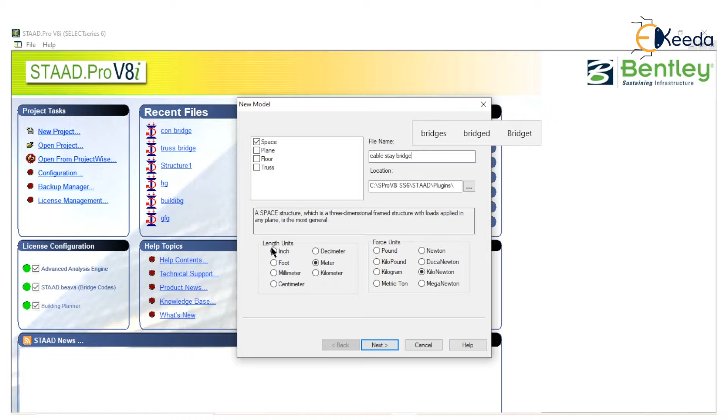Open new project as a space frame and provide a name as cable stay bridge. Select a location. Length unit will be meter and force unit is kilonewton. Next and finish.

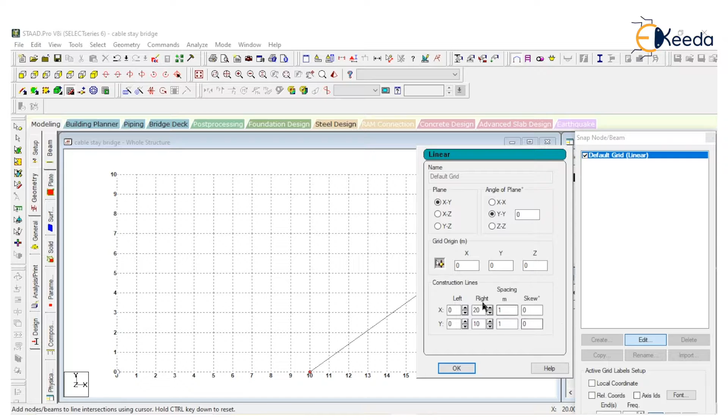Just go to edit and edit it up to 20. At the 10 meter, I'm providing one column. I just increase the height up to 15 meters. Okay. Now at the height of 6 meter or 8 meter, I am creating one beam.

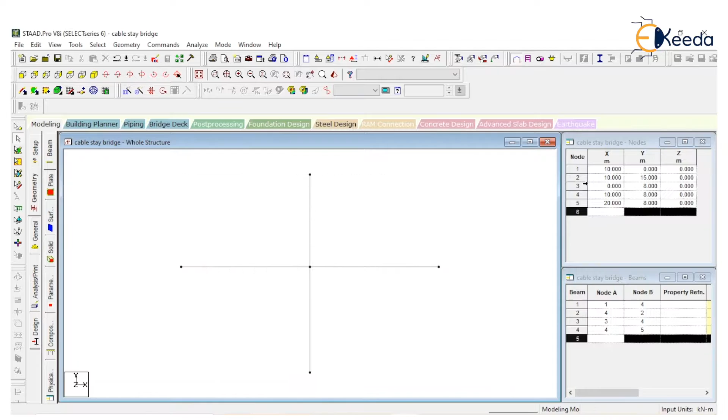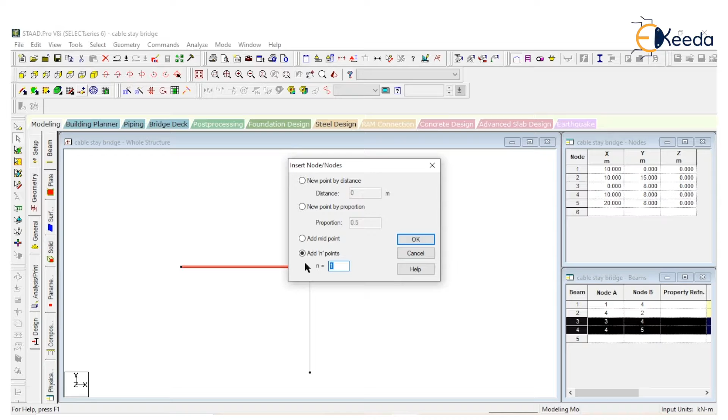Now look at this. Just add some nodes to this particular beam. Insert node, add n points, and I am just adding 7 nodes or 8 nodes to the beam. And in this beam also, I just add some nodes, around 8 nodes, add n points.

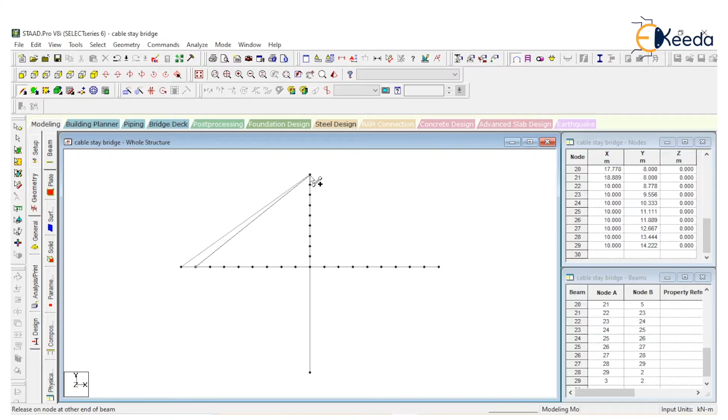Okay. Now go to add beam one by one from first node to the next node. All these are the cables. Just create all the cables.

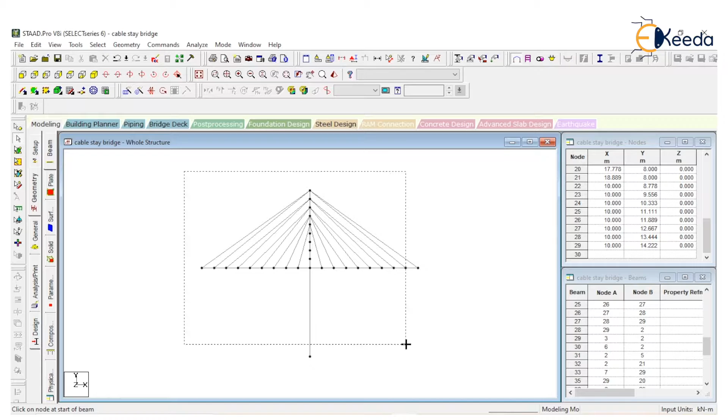Okay. Now select and translational repeat in Z direction. One step of 8 meter or 6 meter I am providing. Link steps, open base, and okay. Look at this. The bridge is created, but take a front or side view and delete all these members.

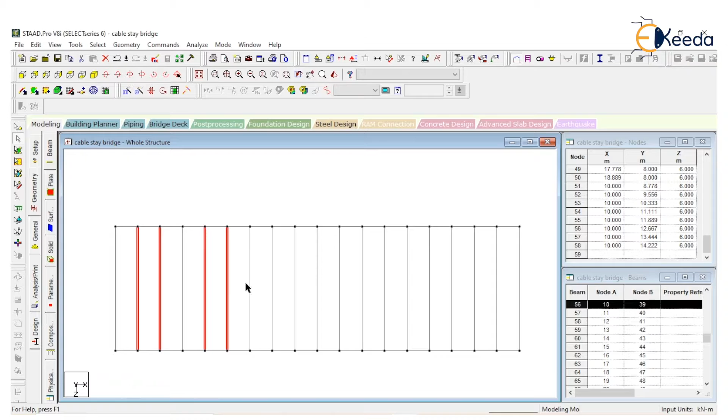Do not delete the bottom member. Okay. Bottom member will remain same. You can delete some intermediate members. Take a top view, I'm just deleting all these members. Then go to side view, select this, insert node, add midpoint. I just want to add one point in between.

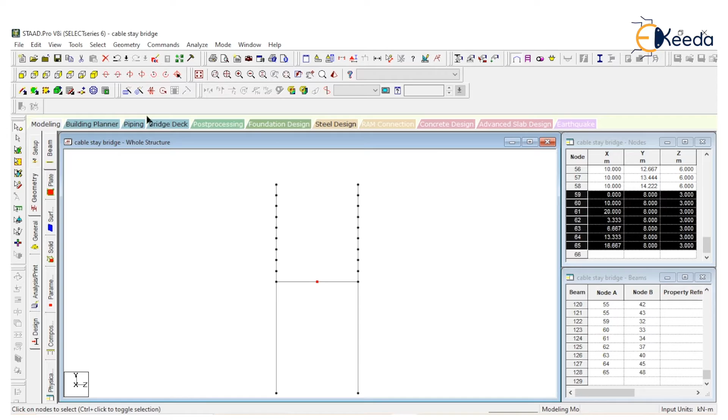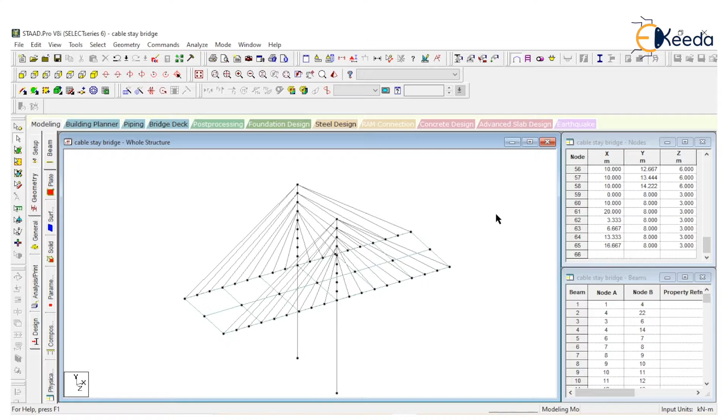Take a node cursor, select this and go to geometry. Connect beam along x-axis. Okay. Now look at this. There is one another member. Go to the beam cursor, select all these beams. Fill floor grid with plate. 12 new plates are created. 3D rendering. Okay.

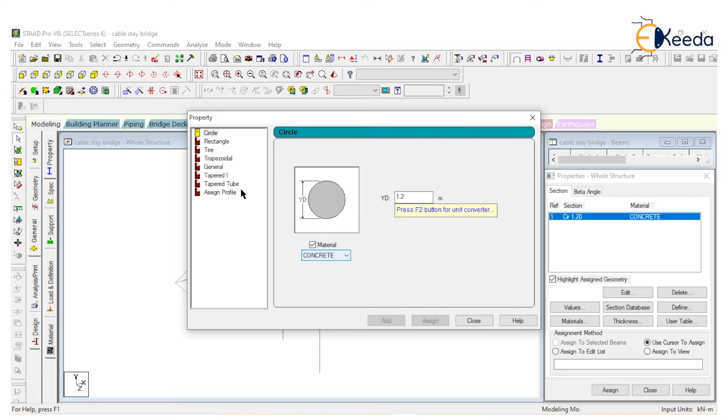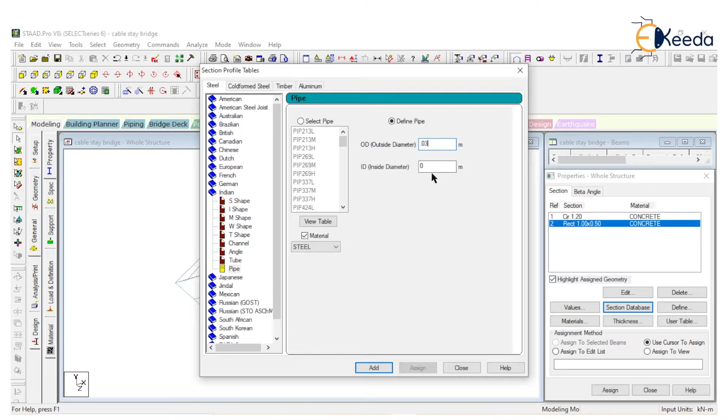General property. Go to define. For column, I am providing a dimension of 1.2 meters. For all the beams, I am providing 1 meter depth and 0.5 meter width. And for the cable, go to section database, Indian pipe, and define outer dia. I am providing 0.03 for 30 mm, and do not provide any inside dia, and assign it to all the cables. Assign to selected beams, assign, and yes.

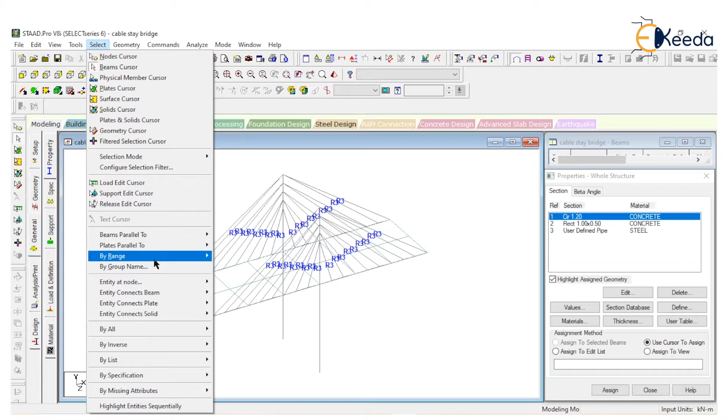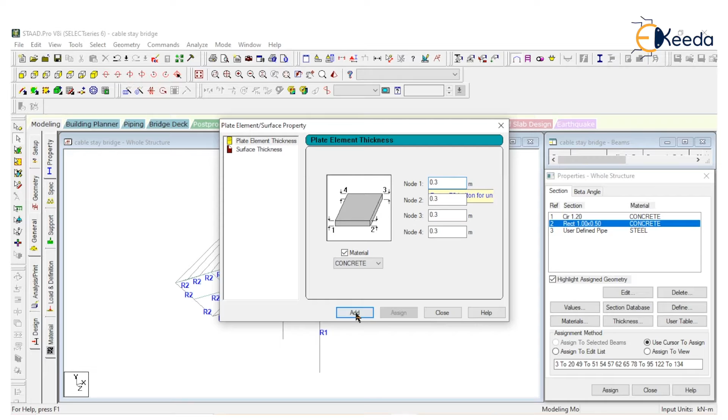Okay. This one is for all the vertical columns, and the next property is for all the beams. Take a front view and select all the beams. Assign to selected beams, assign, and yes. Go to the thickness, for plate thickness. I'm providing 0.3 meter and assign to view. It's a 3D rendering.

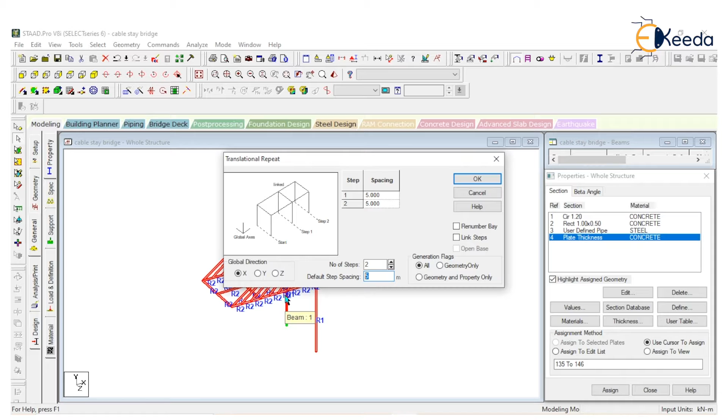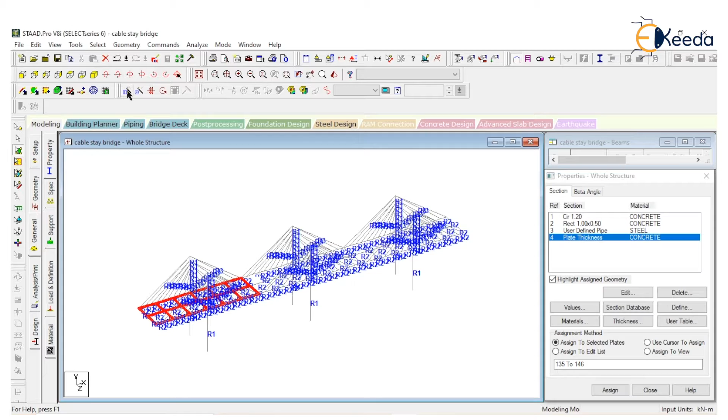Select this one, go to translational repeat, 2 steps I'm repeating it, of 20 meters and okay. It is repeated 2 times. Okay, what is the mistake? We have not repeated any slab element. Just select all the slab, or before it select by the geometry cursor so that it will repeat automatically. Go to X direction, 2 steps of 20 meters and okay.

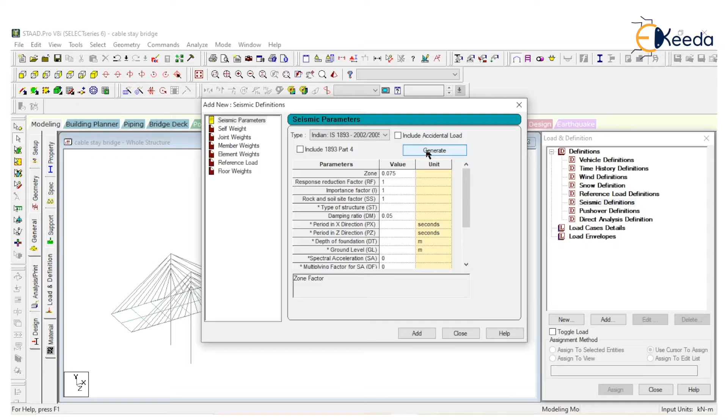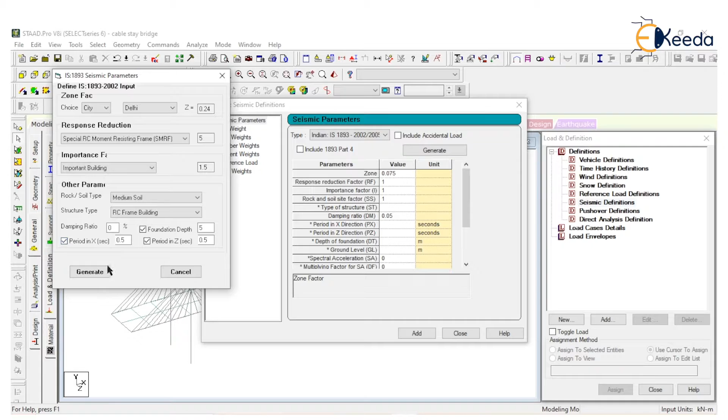Now go to load and definition. You can provide seismic loads in this particular structure. Go to seismic definition, Indian IS 1893 2002/2005. Go to generate, select a city. I'm selecting Delhi, and special RC moment resisting frame. Importance, medium soil, RCC, damping, depth of foundation, period in X and Z. Add the self weight and okay.

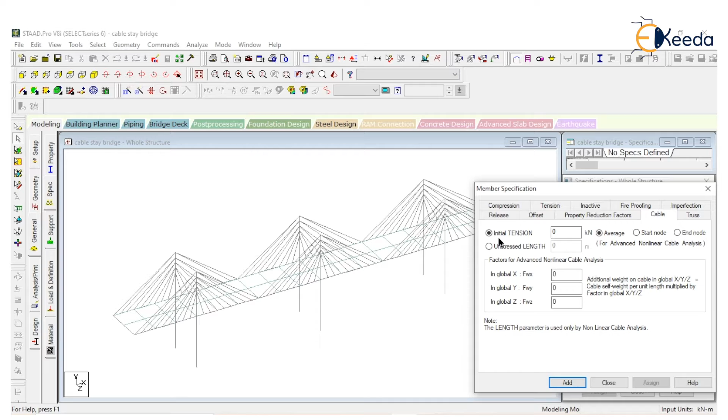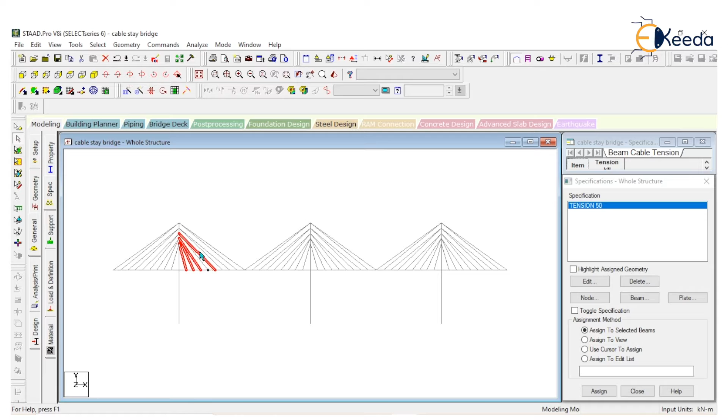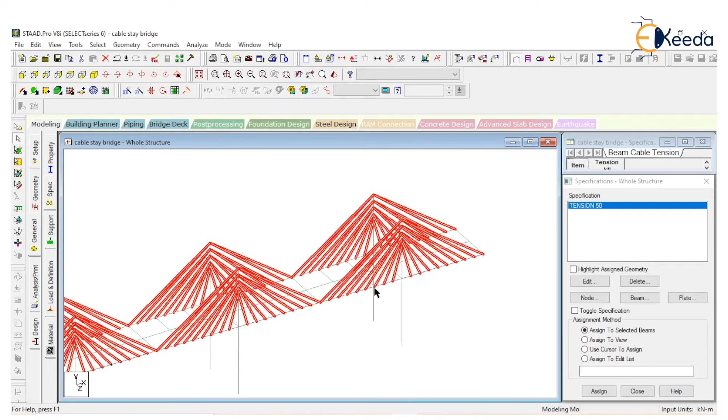Before that, we have to assign a specification for the cable. Go to specification, beam, then go to cable. If it is a tensioned cable, then provide the tension. In this particular, suppose I am providing a tension of 50 kilonewton as an average tension in this cable. Select this one, select all the cables. Select all the cables carefully. The property of cable we have to assign in all these members. All are selected. Assign to selected beams, assign and yes.

Right? Go to support, create, fix the support and assign to the bottom nodes. We created a definition of the seismic force. Now go to load case detail, add, select the seismic in plus X direction, seismic in minus X direction, seismic in plus Z direction, minus Z direction. Then we have to provide a dead load and live load. Loading type will be live.

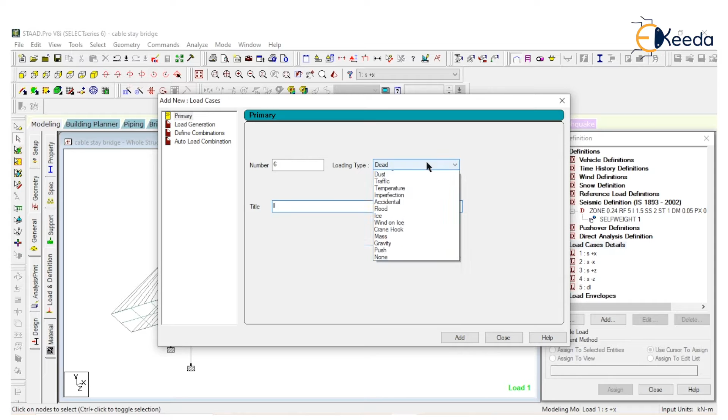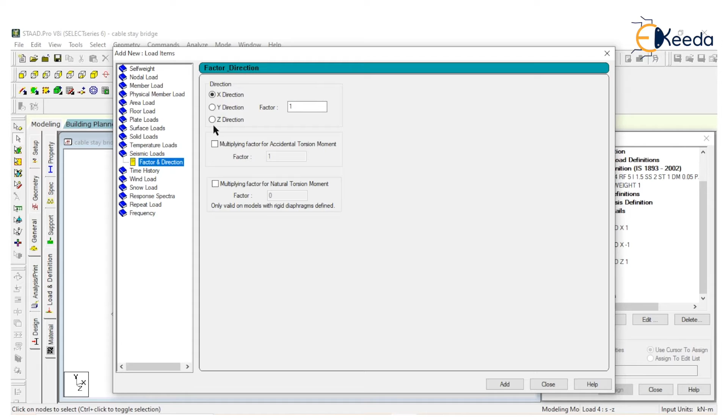Select the first one, add seismic load, X direction 1 factor, add and close. Select the second one, seismic load, X direction and minus 1 factor. Plus Z direction: go to the seismic loads, Z direction 1 factor, add this and close. Go to the next one, seismic in minus Z direction, add this as a seismic load, Z direction minus 1 factor, add and close.

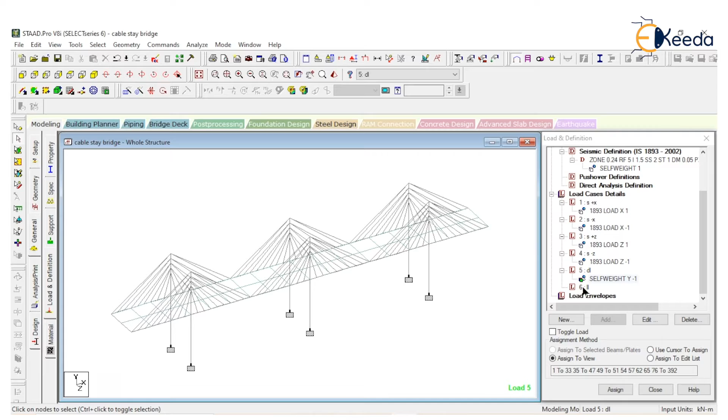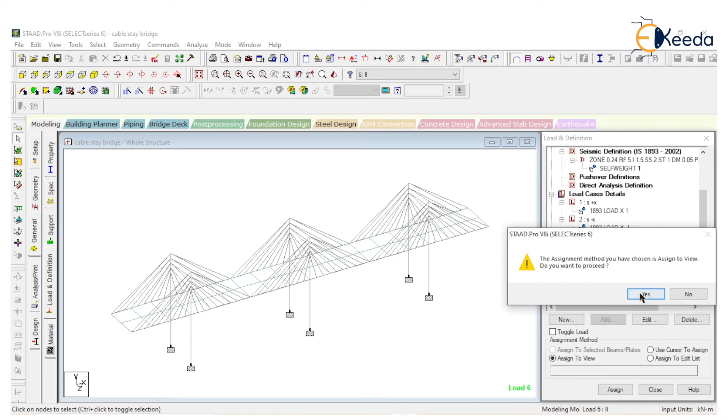Then go to dead load, add. In a dead load, just provide a self weight of the structure, assign to view this. In live load, you have to provide a vehicle load. This I am providing as a plate load, pressure on full plate. For example, I am taking 30 kilonewton per meter square as a plate load on a full structure. Assign to view. All the plate load is applied. In this bridge also, we have to provide a segment loading for first, for second, for third. But for the analysis, I am just providing throughout the length.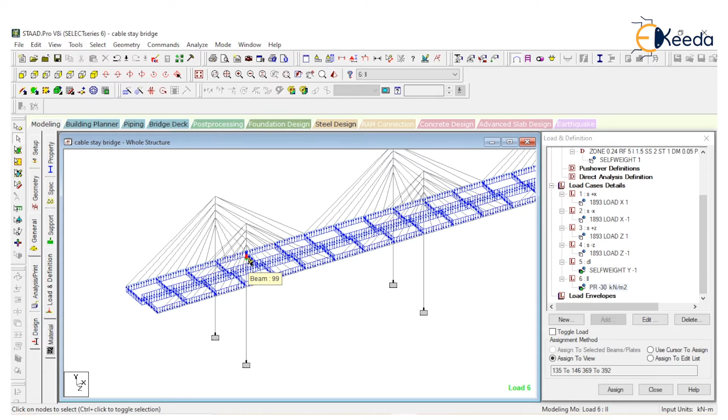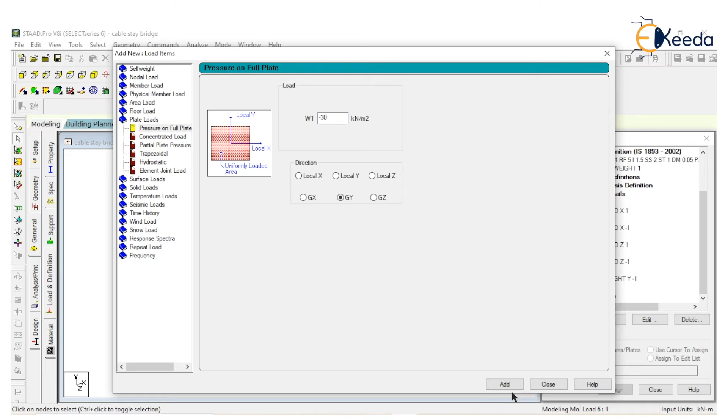Okay, just delete this one. Some of the plates are in opposite side, so the load is applied from downward side to upward side. Select a live load. For this condition, we have to provide two different type of loads. First is positive 30 as a pressure on full plate, and second one, go to plate loads, pressure on full plate minus 30, and select a direction as GY. Last time I applied a load in local z, so just select GY, global Y direction. Okay, and assign to view.

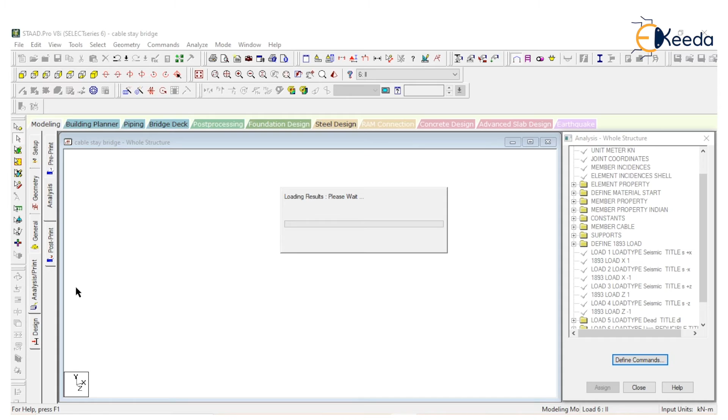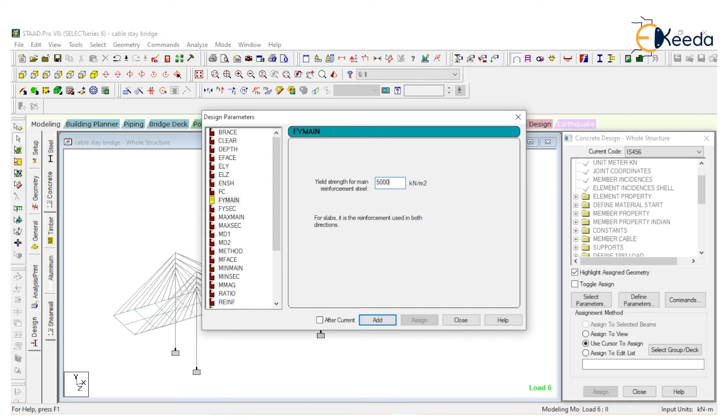Now go to analysis print, add and close, analyze and run analysis, save. For the design, just go to design, concrete, IS 456, define parameter FC as I'm providing 30, and FY main I'm providing 500. Just go to command, design beam, add, design column, add, take off, add and close. Assign to view. FY main also assign to view.

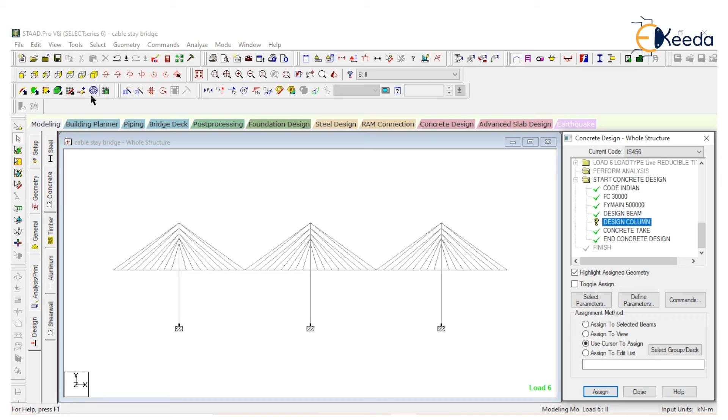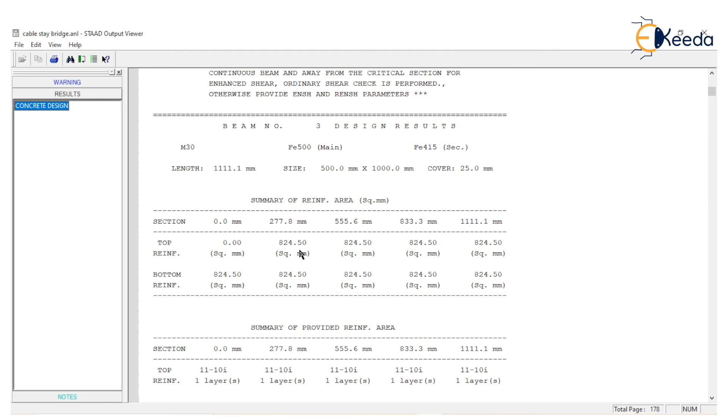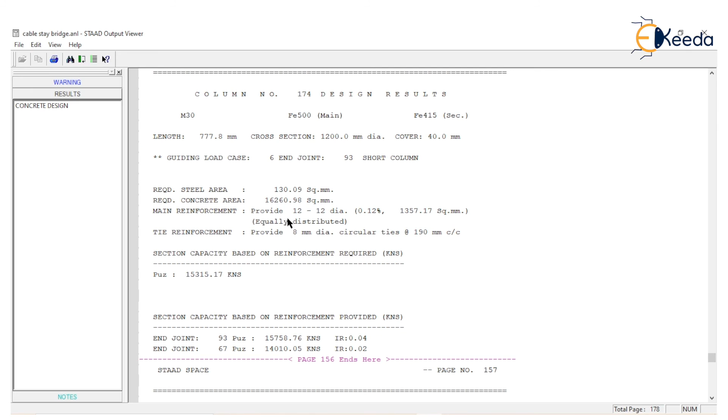Design beam, assign this parameter to all the beams only. Assign to selected beams, assign and yes. For the design column, assign this property to the column only and analyze it. Okay, view output file and done. Length and depth ratio is not proper, so ignore the warning and go to the results. At the top, you have to provide 11 bars of 10 mm dia. At the bottom also 11 bars of 10 mm dia in beam. So like that, analyze all the beams and columns. In column, 12 bars of 12 mm dia and so on.